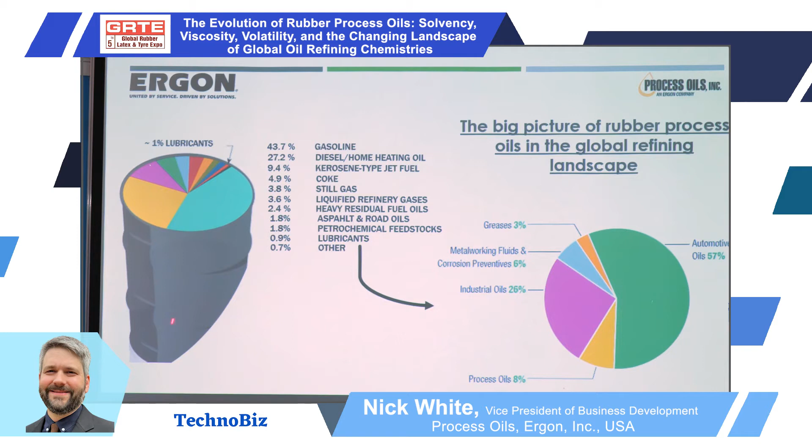So just to start out, I like to talk a lot about rubber process oils. It's very important to all of us. We use it every day. But in the big picture of all the refining capability in the whole world, how do our products fit in? What you can see is this is a barrel of crude that comes out of the ground. And that's 42 gallons. And of that barrel of crude, what comes out of that we use?

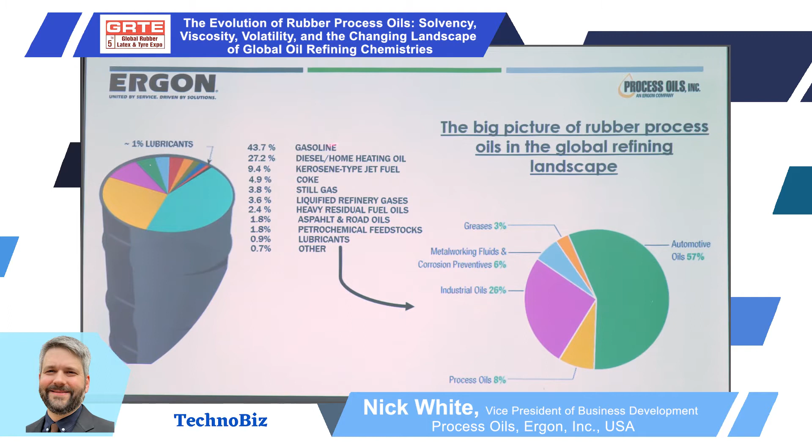Well, the vast majority of what comes out is combustibles: gasoline, heating oil, jet fuel, refinery gases, residual fuel oils. 95% of the refineries in existence today are in the business of making combustibles to power our cars, to heat our homes, to make petrochemicals. This is us right here. A little less than 1% comes out as what we would describe as a lubricant oil.

And then if you take this 0.9% and you break that down, you will see the vast majority of that 1% goes towards lubrication: engine oils, industrial oils, metalworking fluids, greases. Really, we fit right here in this 8%, what we would call in the refining industry process oils. And if you break that 8% down even more, you'll find that rubber process oils make up probably about 40% of that 8%.

So if rubber process oils are 40% of 8% of 1% of all the refining capability in the world, it makes a lot of sense as to how the refining and the rubber process oil business has evolved. Today, over half of all the rubber process oils made are actually made by specialty refineries that are focused on providing lubricant oils and process oils for those customers that really need it.

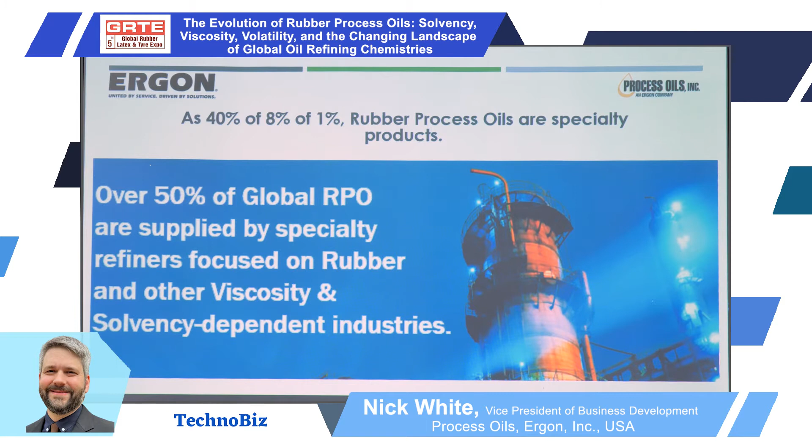You used to be able to buy a lot of rubber process oils from Shell and BP and Exxon, and those days are really over. The process oil market has almost become too small for them. They're focused much more on other industries.

So, talking a little bit about the big major oil companies of the world and the specialty oil companies, what you'll find is a difference in what they produce. If you take all the refineries around the world, what do they make? This is similar to what I showed a few slides back. 86% are combustible fuels, and then we're right here with base oils that get turned later into process oils.

For us, Ergon, and a number of other companies around the world that focus on rubber process oils, 60% of what comes out of our refinery are base oils. We sell those into the lubricant industry and also into the process oil and rubber process oil industry. So we're only making 19-20% combustible products simply because we have to make these products.

So now that we've talked about what's made, how much is made, and how we fit into it, we can talk about what types of refineries make these rubber process oils we use, and what the different chemistries are. If you start with crude type, there are roughly two different types of crude in the ground: more paraffinic crude and more naphthenic crude. Paraffinic crude tends to be a more saturated product, whereas naphthenic crudes tend to have more unsaturation in them.

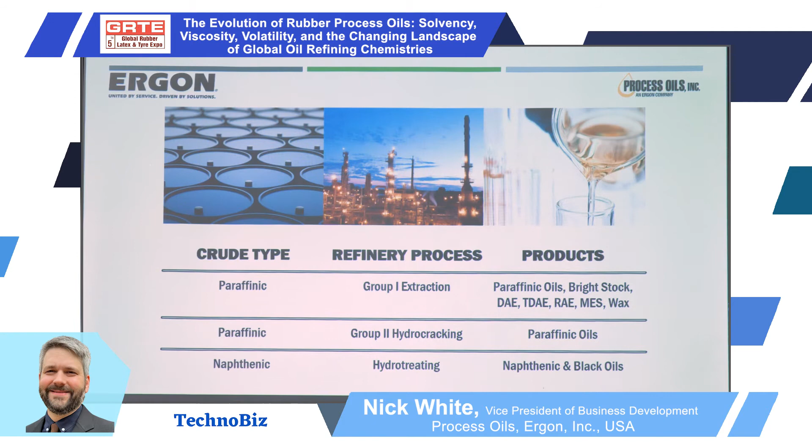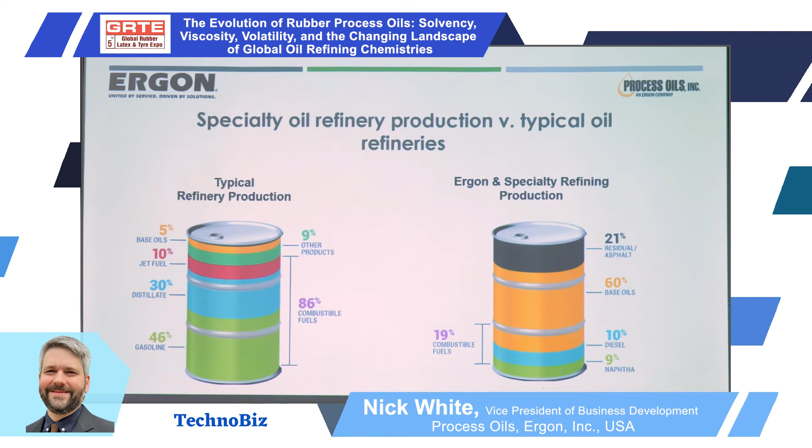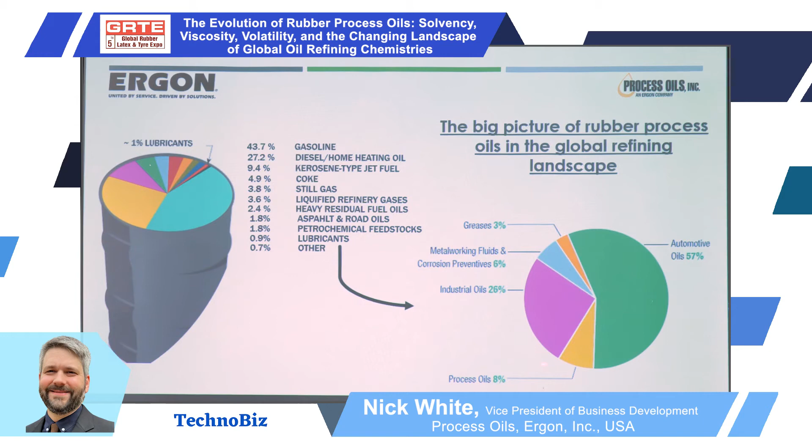So how does this affect the type of applications we use in rubber? A lot of times you pair oil and rubber due to polarity and compatibility. You have your more polar applications and your more non-polar applications. Back in 2004, there was tons of product that fit very well into polar rubber applications, SBR, BR, tire rubber, those types of things, and not so much for the more non-polar rubbers like EPDM, butyl, those types of rubbers. And that trend is changing, right?

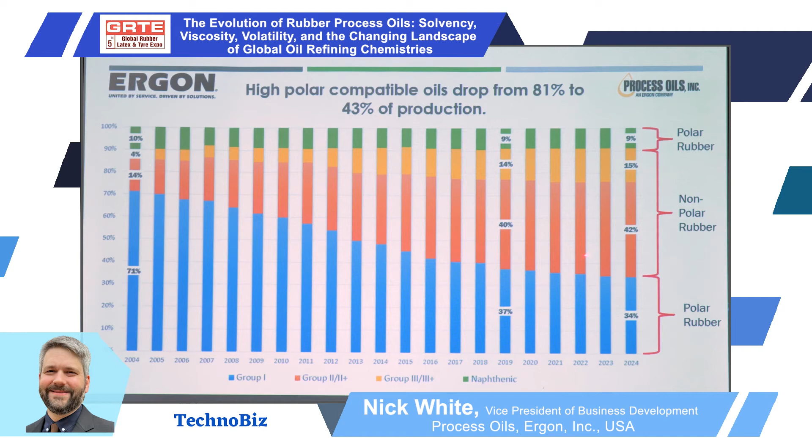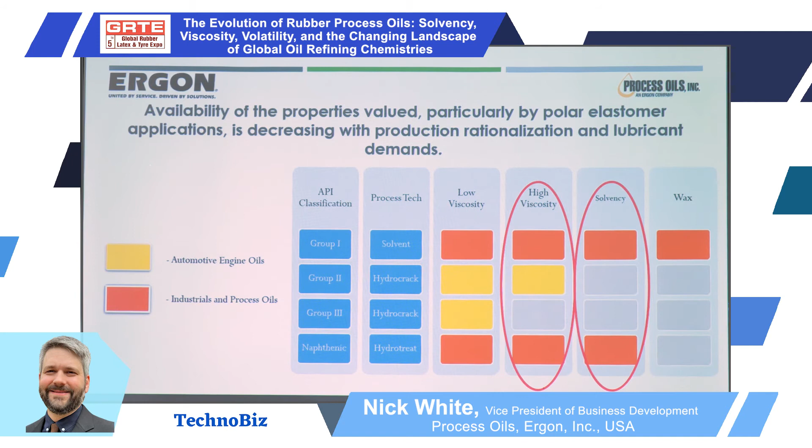So this just shows where we're at in that trend, what we're losing as far as the oil and the properties of the oil, right? In Group 1, you get both low and high viscosity, and you get solvency in your oils. In Group 2 and Group 3, you start to lose that solvency because it's a highly saturated molecule. Aniline points go way up, and solvency and the ability to help with cross-linking and functionality kind of go down. And you also start to really lose viscosity when you get into these other products. Naphthenics provide the same things as Group 1s for the most part, but there's no wax that comes out of naphthenic production.

So, to wrap everything up, this is what it translates into as far as the polarity of different polymer systems and the oils that are made today, right? So what you have is these more non-polar rubbers that are being well served by mineral white oil or medical white oil, technical white oil, Group 2s, and a lot of your recycled oils that are made today are highly, highly saturated just because that's how they're processed. You take the dirty used motor oil, and to clean it up, you end up having to saturate it quite a bit to clean the molecule up.

You've got the Group 1 paraffinic oils right here, which have been really a workhorse. They've been used quite a bit in the rubber industry, particularly in Asia for many, many years. But the production of those is starting to go away. Naphthenic oils and black oils, which are a type of naphthenic oil, these are specialty products. If you go back to the previous slide, it stated about 9% of total production for a very long time. It's a niche. It's there. People use the chemistry. Not too many changes.

And then you have your RAE and TDAE oils and your DAE oils, again, that are in blue. They're linked to the Group 1 paraffinic. And then you have all of these things happening. Group 1 starting to slowly go away. Group 2 starting to grow. And at the same time, we're all looking for recycled, renewable, sustainable oils, right? So what you start to see is a lot of people go into recycled oils or pyrolysis oils, and also quite a bit to plant-based oils. And your plant-based oils are highly, highly polar in nature. So they fit down here as far as compatibility with your different rubber systems.

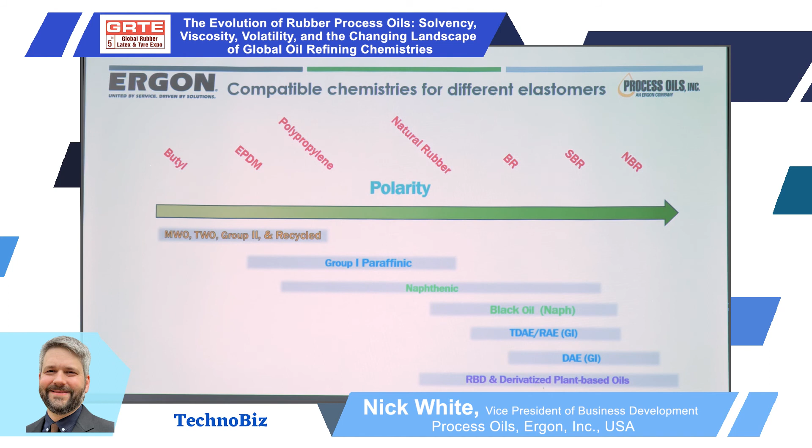So the last slide is just to give another picture. This is the rate of decrease or increase in Group 1 refining production around the world. So again, these refineries that are making Group 1 base oils or are making TDAE, RAE, MES, you start to see that they're starting to go away. And this is because the refining industry is moving more towards what the lubricant industry wants, which is highly, highly saturated products. So we start to lose solvency and viscosity that we need in some of our applications. We're starting to lose that around the world.

China is the only place where there's actually been a growth in Group 1 production. This is not necessarily a bad thing. The point of this presentation is really to show that you have to think strategically about how you source your raw materials, and the rubber process oil industry has remained kind of static for a really long time. But we're starting to see some changes to where your availability of some of these oils and chemistries will start to change over time. There's been tons of rationalization in the Americas and in Europe. There's still quite a bit of Group 1 availability throughout Asia, but that is slowly starting to change.

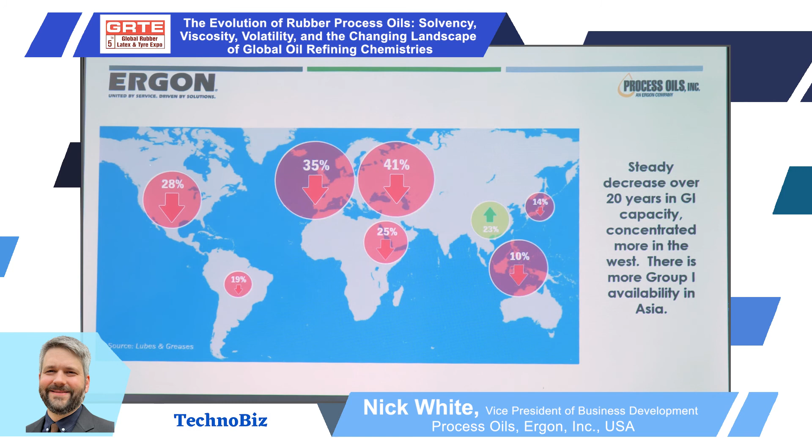So that's my presentation. Any questions? No? Oh, yes. Yeah. No problem.

One question regarding the previous slide, the bottom part, that's the RBD and the derivatized plant-based oils. You are describing here a wide range of compatibility. Are they in general principle compatible with all the range you reported here, or are there different types of RBD and plant derivatives that are more specific for this segment?

Yeah, so when you start to get into plant-based oils, I have right here that they're compatible with these oils, but these are not drop-in products at all for, let's say, a TDAE or an RAE. These oils are insanely polar, so you have to really change your formulation to incorporate these oils. Now, among these oils, are there any that are more or less compatible with BR, SBR, NBR? Typically,

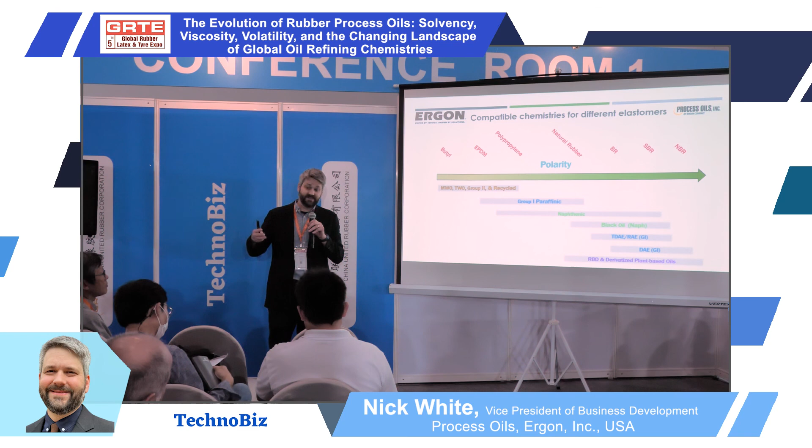when you have a plant-based oil, it's a triglyceride, so you have a glycerin backbone, and you've got three fatty acids, right? And there are saturation differences inside those fatty acids that can make a difference. Something like a soybean oil has quite a bit of double bonds. Something like a palm oil is pretty saturated when it comes to those fatty acids, but you've still got an ester group that sits on top that provides a ton of polarity. So it's a different structure oil.

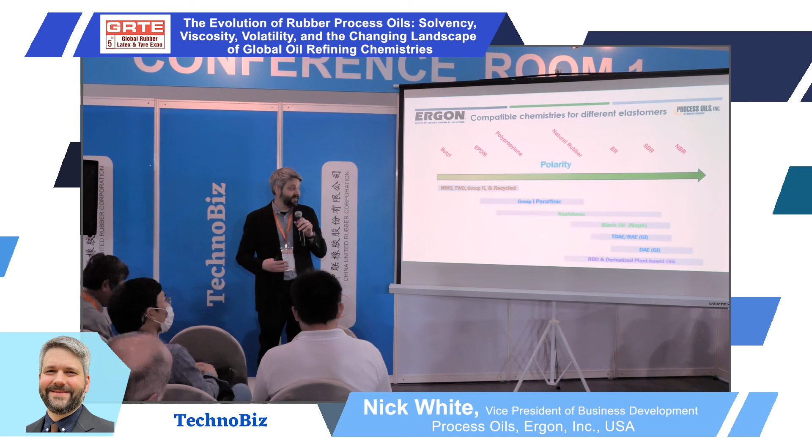No matter whether you use a more or less saturated vegetable oil, you're going to have a lot of polarity in it. So what I'm finding in what we sell to our customers of vegetable oils, it really comes down to what's locally available and what's the cheapest. And they try to make that work because they're having to do quite a bit of reformulation anyways to get the product to stay in the rubber.